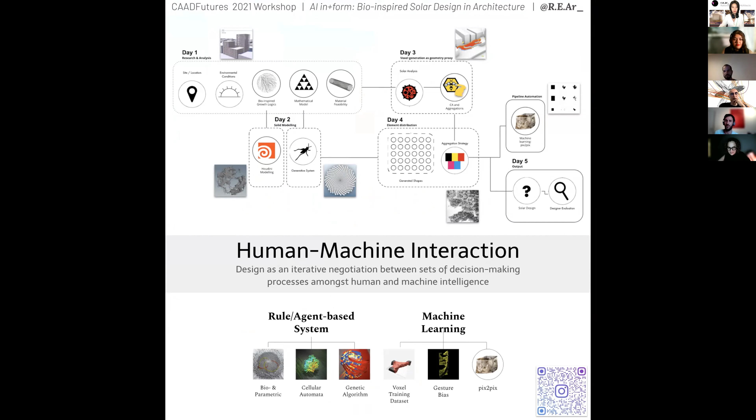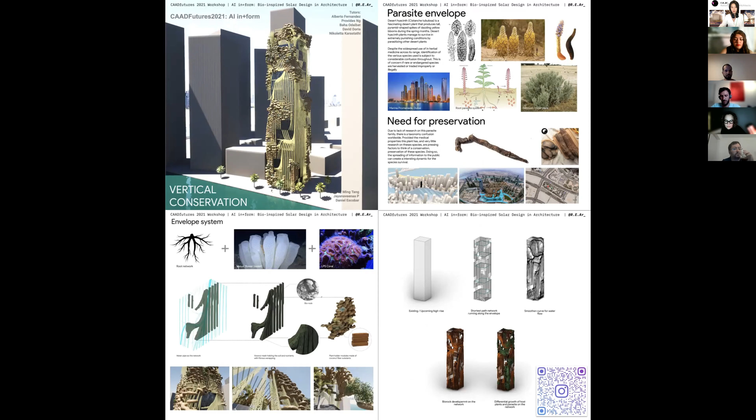By combinatorial, we mean that computational components can be arranged freely according to the defined inputs as iterative feedback loops. And equally, form finding is not simply taken as optimal resultant shapes, but information that acts as protocols or instructs the distribution of elements, operating in a straight relationship with an environment and its available energy. As inspired by organisms in nature, which win over all kinds of solar problems by each developing a unique solution, acting as models of cities and drivers of our key design principles.

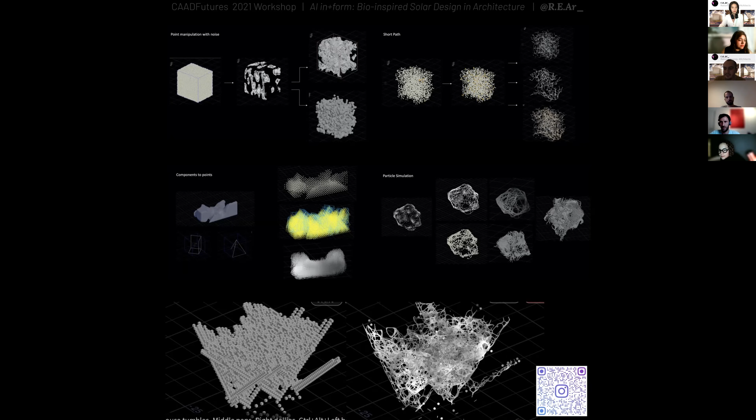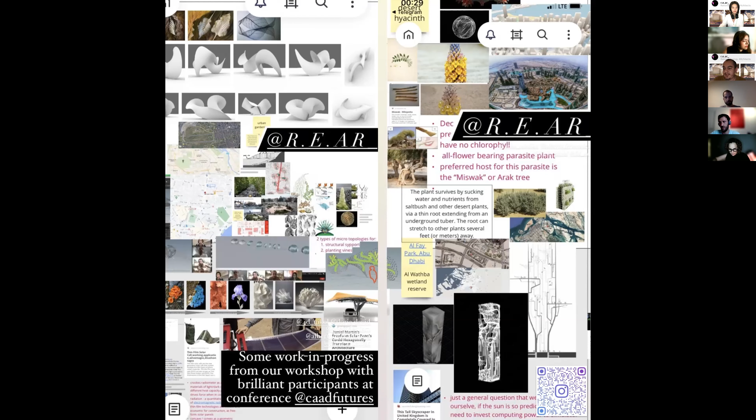How to diversify solutions in maximizing surface to volume ratio constraints beyond conventional tile paneling techniques that are often in direct energy competition with our surroundings? Focuses on organism biological and topological response to site conditions, understanding and utilizing principles behind their growth and aggregation. This project rethinks how this may lead to efficient form finding and bio-design methodologies. Also, in recognizing their adaptability, the goal is a formulating of collaborative intelligence between different forms of biological topologies, synthetic and designer intelligence, human-machine interactions.

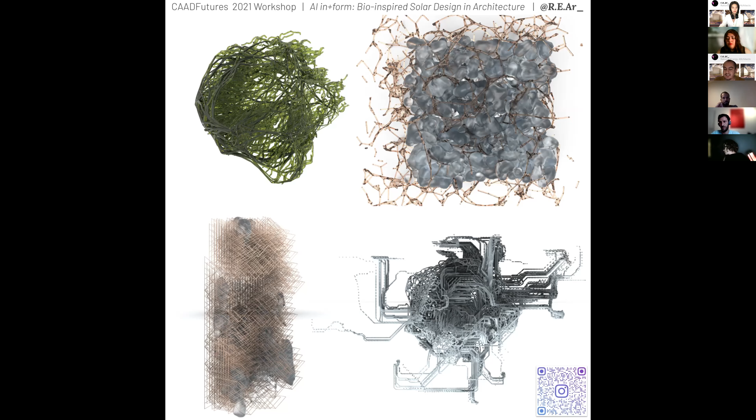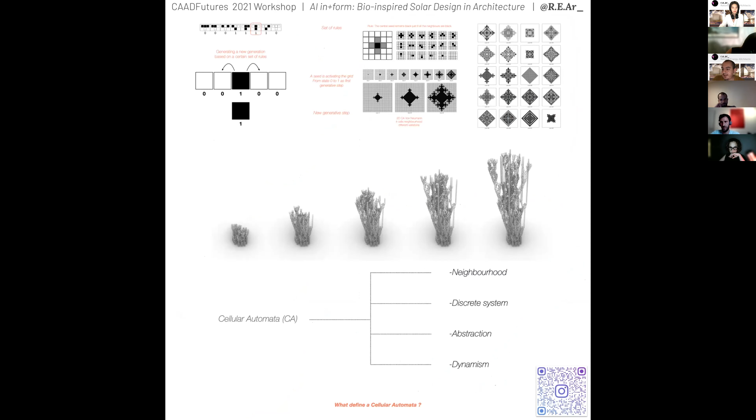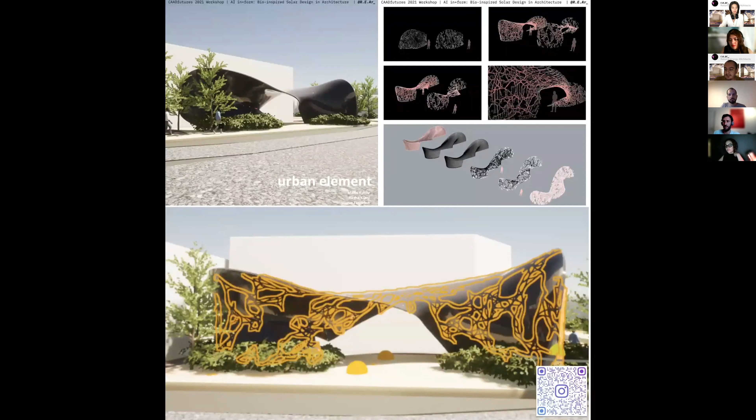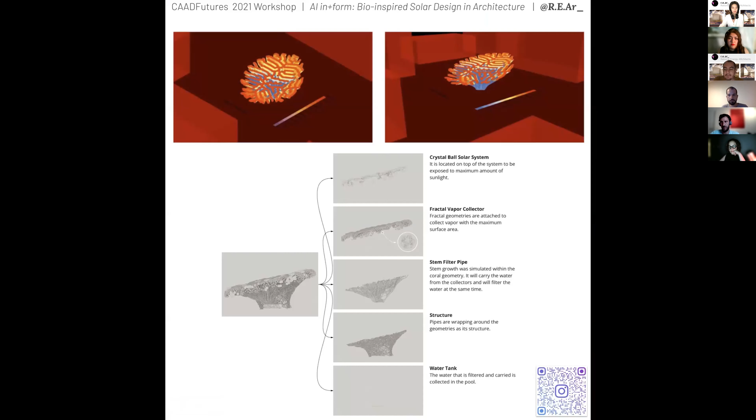As a rule, agent-based intelligence, cellular automata, CA, is being studied as a complexity model from iterating simple rules, dynamic in its solutions, discrete in its structural composition, and material memory of a system. Complex patterns and classes emerge from interactions with its internal or external environments with a limited set of initial cells, seeds. Coupled with genetic algorithms as an artificial selection method, identifying generational and combinational optimal that evolves towards a valid set of options for a specific problem based on particular parameters. In our case, the accumulation of discrete solar incidents on the surface of a form, like this one.

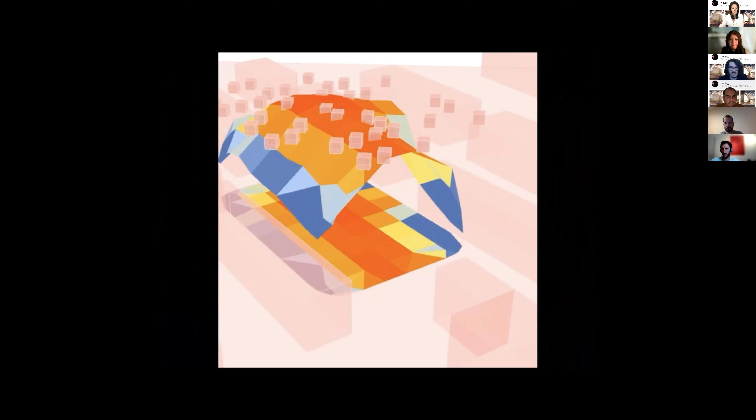Conditional generative adversarial networks, or CGANs, as a learner in the process from the voxel aggregation data points, automates the CA-GA feedback and adapts to new design context in an almost instantaneous manner when trained. So, machine learning is the scientific field that builds intelligent entities to reason over complex cases artificially. And its training process usually involves data sets that define to the AI algorithm what it should do. However, a poorly constructed data set can lead to the reinforcement of problematic biases if they are forsaken or ignored by developers. But this research chooses to take advantage of biases in machine learning to formulate human-machine interaction.

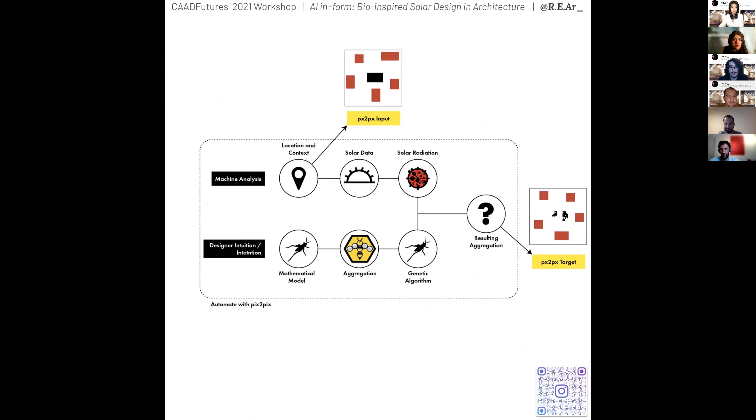The proposed meta-design pipeline takes data produced from computationally intensive and intuition-based processes to create the training material that helps the algorithm to learn hidden patterns, predicting results with relatively lightweight computation. Through this strategy, biointelligence and designer intuition are embedded into the algorithm. In this sense, three types of AI manifest themselves into an integrated workflow of optimization and generalization, aiming to reach an equilibrium between generative and discriminative models from different perspectives of a system.

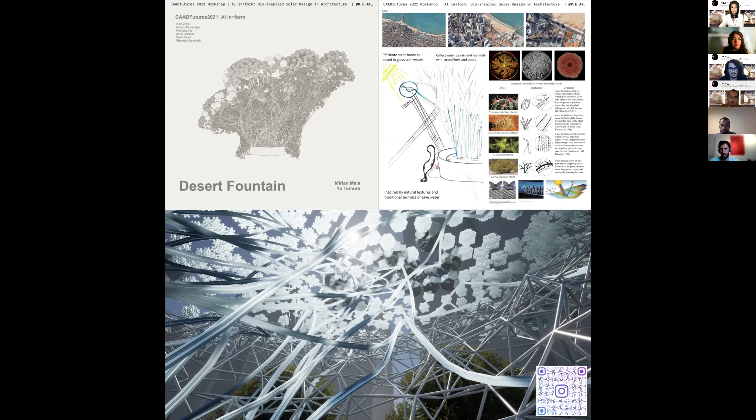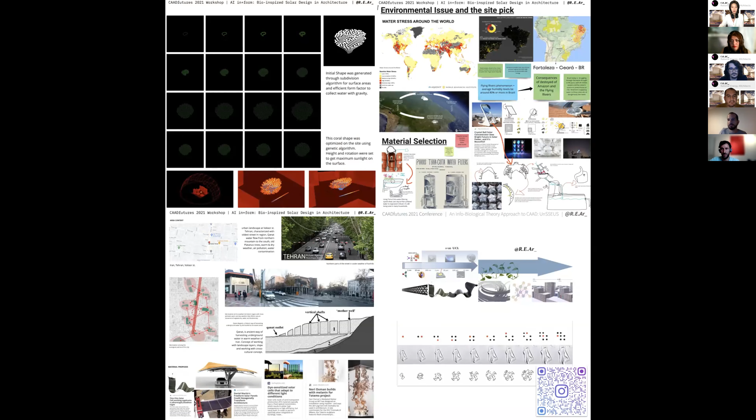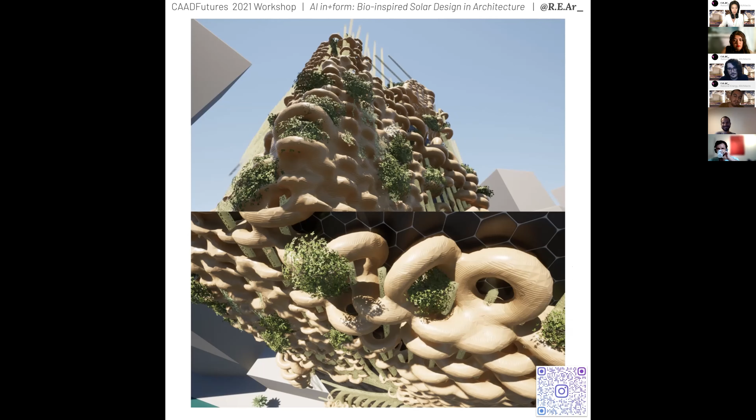So in diversifying solar design, AI in+form speculates to decentralize light harvesting and build the capacities of individuals to generate electricity locally. The designs are concurrently constrained and inspired by emerging smart materials like thin film, perovskite, and LSC technologies for solar designs to be taken indoors and to all kinds of surfaces in the built environment. In particular, carbon-based nanotubes would enable us to further parallel biomimicking and generative designs with energy dynamics of organisms, stimulating research that looks deeper into biological light harvesting systems. Of course, the complexity of parameters, the amounts of data and scales that have to be comprehended highlights the significance of AI in+form finding.

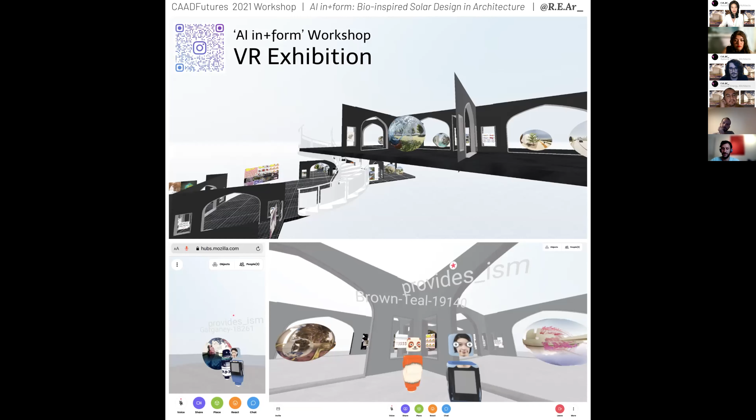The workshop results by our brilliant and talented participants are hosted on this virtual reality gallery. It is accessible as multiplayer via web browser.